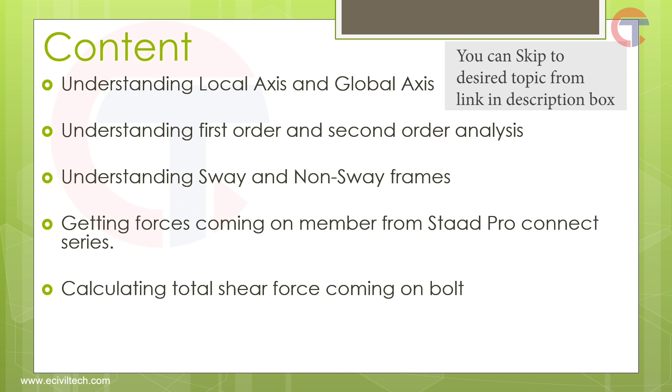I will explain later in this video why I have included this topic. Then we will understand sway and non-sway frames. Then we will learn how to get the forces coming on the member in StaadPro, and after that how to calculate the total shear force coming on the bolt from the member.

Finally, we will learn to design a bolt connection using IS 800-2007 on Excel sheets. So these are the contents which we are going to cover in this particular video.

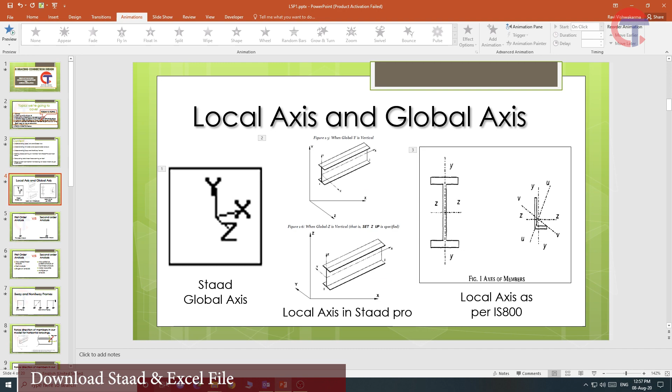Before jumping into local and global axis, let's visit our website and download the content we made in the previous video of this series. I will go to the browser and type www.eciviltech.com, hit enter. This is our website. Go to the Learn button and click on Steel Structure Design. Now I will scroll down to the bottom of the website, and here you can see download supporting files of lecture 4. Click here, choose Desktop, and save it there.

You can see the file has been downloaded now. I can minimize it. Now you can see this folder has been downloaded. I will right click and choose extract files here. Now this L4P1 is the extracted file. I will enter this folder and make a new folder, giving it the name Staad File, and move the 15-meter high ground tower Staad file into this folder. Let's get into this folder and double click on this file to start Staad.

Now you can see this beautiful model of the 15-meter high ground based tower. At the bottom corner you can see the 3D coordinate axis. Y is the vertical axis, X and Z are in plan - these are two horizontal axes. These coordinates are called global axis. This is the coordinate system which Staad follows: Y is vertical, X and Z are in plan.

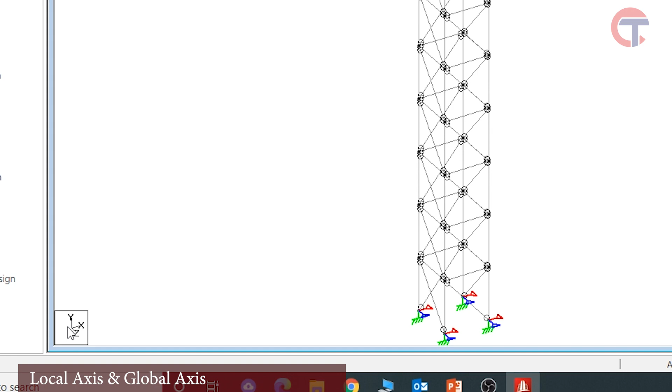Now hold the Shift button on your keyboard and press O. Now you can see these are the local axes of every individual member. Right now it is completely messy and you are not able to see clearly, so what I will do is make only the back panel visible. To do that, I will go to View and choose Top View.

Scroll down to zoom out. I will select the back panel only, then click on isometric view, then click on show selected object. Now you can see only the selected object is visible. Don't worry, nothing is deleted, we are only hiding the front panel to understand it more easily.

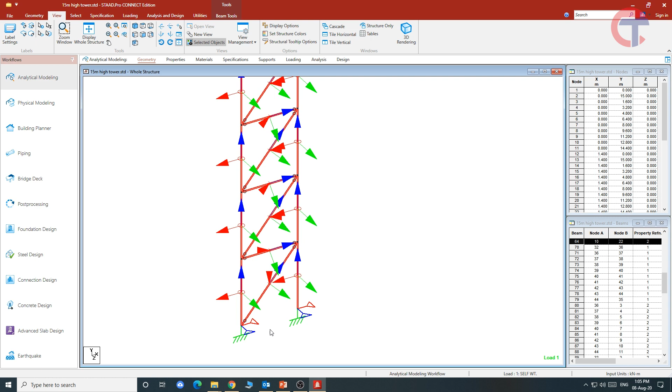Now holding shift button I will press I. You can see 3 arrows are visible now. It is origin. Now you can see the origin XYZ over here, and now I will hide this support because this support is hindering the visibility of the origin.

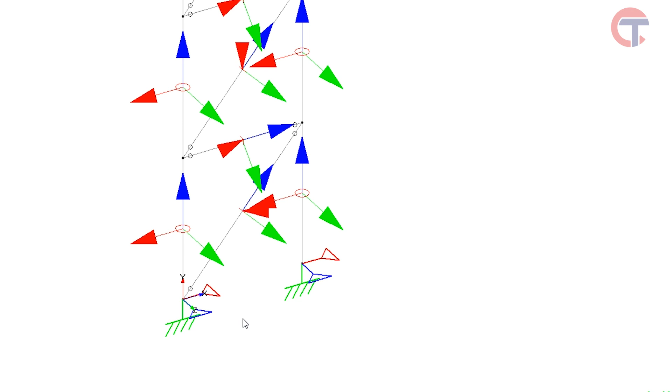To hide the support I will press S holding shift button, shift S. Now you can see the support is hidden. It is actually there, but it is just not visible, so that we can easily see this origin.

Now here you can see X axis is in blue color, Y axis is in red color, and Z axis is in green color. Now look at this member. This X axis is along the axis of the member. Here also for this member, this blue arrow is along the axis of the member. It is along the length of the member. So these are the local axis of each and every individual member.

So what's the benefit of this local axis? These are the two benefits. One, you can apply the load in the direction of the local axis. Second, you can check the forces coming on the member in the direction of the local axis. Let me explain you this.

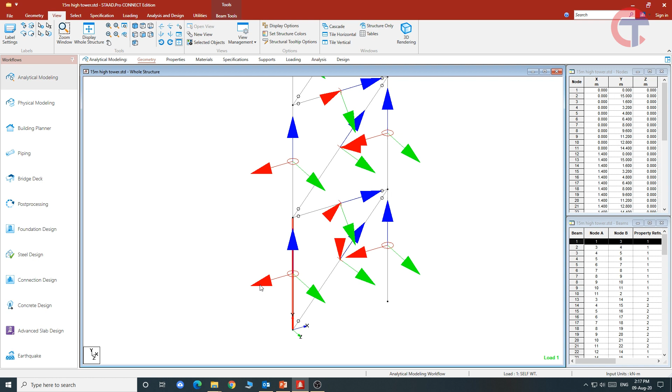Now look at this vertical member. If I want to apply a horizontal load, then I can use two methods. One, I can use global axis, other I can use the local axis. Now let me show you.

I will go to loading, here loading. Let me zoom by scrolling up. I will apply a temporary load, and later I will delete that load. I am just showing you. Now here I will choose this self weight for the time being. Here I will click add, and now I will come to member load.

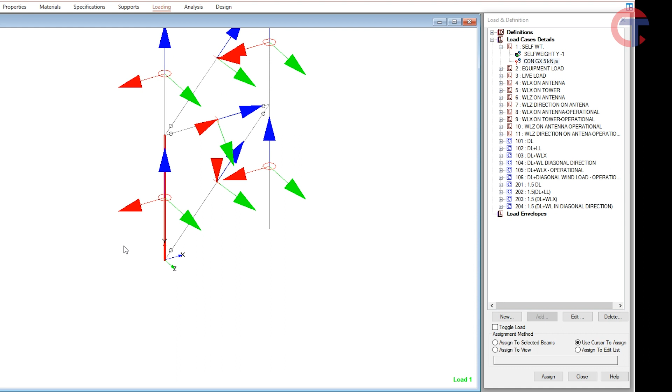Member load, and here I will choose concentrated force. Now let me choose a load of 5 kilonewton. I will type 5 kilonewton over here. Now I will choose global X axis over here, and I will say add. I will close it. Now let me apply this load on this member.

I will select, use cursor to assign. No, I will choose assign to selected beam and assign. Yes, now you can see this load is assigned in global X direction. Now let me apply the same load on this inclined member also, and I will choose assign to selected beam. See here, this particular load is assigned on this member and this member. Now you can see both the loads are in horizontal direction.

Now what if I want to apply a load along the axis of this selected diagonal member? Then it is not possible using any global axis, as the axis of this member is not along any of the global axis. So we can apply load along the axis of the member by using the local axis of the member. Let me show you how you can do it.

Double click on this load which we have applied. Now here we can see we had applied global axis, that we have to change to X local axis, because this blue arrow is showing the axis along the length of the member. So we want to apply the load along the axis of this member. So we have chosen this X local, and now change. Here we will click on change. Now we can see the direction of the load is changed along the axis of this member.

So this was not possible using any of these global axis. I can show you. If I will choose this GY, then it is in the vertical direction. If I am choosing GZ, it is in this Z direction, and if I am choosing GX, then it is in X direction. But none of this global axis is along the axis of this member. So if I want to apply a load along the axis of this member, then I will have to choose this X local axis.

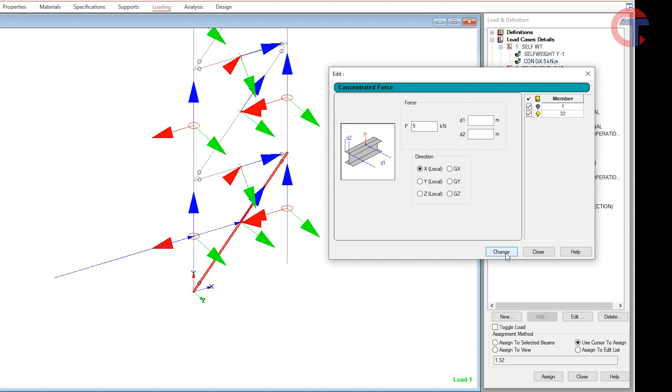Similarly, we can use the local Y axis and Z axis to apply a load along the perpendicular direction of the member. This is the local axis, and this is the benefit of the local axis while applying load on the member.

I will close this. Similarly, after analysis, the software will give us how much load is coming on each and every member. So for this member, if the software gives the load in the direction of the global axis, it will be useless for us. We cannot design any member having loads in the global axis.

Whatever stresses or forces come on the member, they should be in the direction of the member, so we can easily design it, whether compressive or tensile force. So while taking output from the software, it should be in the direction of the member. Here again, the local axis is beneficial for us. So these are the two benefits of the local axis and the global axis.

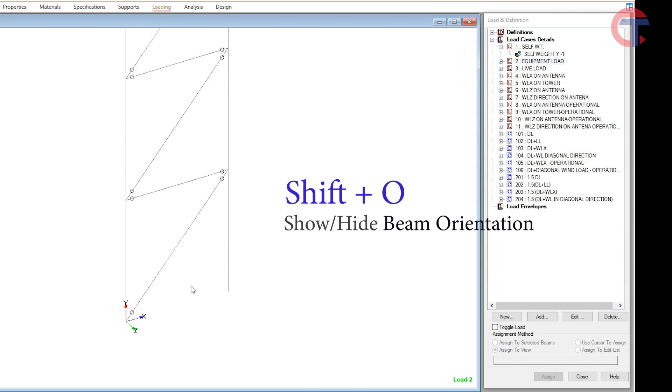Let me delete this, it's not required. Okay, now the loads are not there. Now I will click Shift O to hide the local axis directions, and Shift S to show the supports. Now let's go back to our slides.

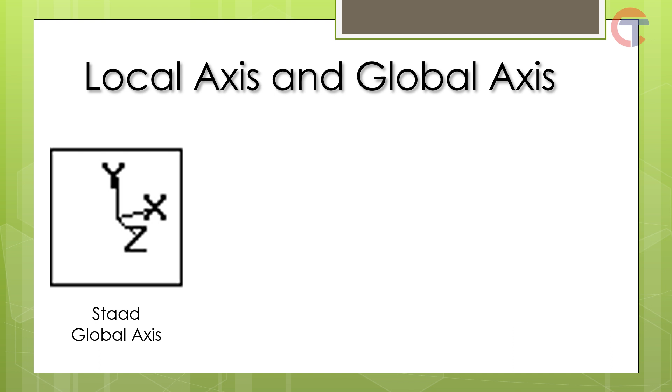Just to give you more clarity, this is STAAD global axis: Y is vertical, XZ is in plane, and in STAAD we can choose our vertical axis as Y or Z. When you choose global axis as Y direction, your local X axis will be along the member, Y will be along the major axis.

And Z will be along the minor axis. Similarly, when you choose Z up, your X axis will be along the member, Z axis will be along the major axis, and Y axis will be along the minor axis. As per our IS code, X axis is along the axis of the member, Y axis is the major axis, and Z axis is the minor axis.

So you can see when we keep Y up, the local axis representation of IS 800 and STAAD Pro are the same. So I recommend keeping Y up only, and by default in STAAD Pro, Y will be up. You can make Z up in STAAD Pro, but it is not required. So this is all about local axis and global axis.

Now let's move forward. Again I will go to view and click on display whole structure. Now I will analyze this structure. To analyze, I will go to Analysis and Design, and we will go to Run Analysis. Save.

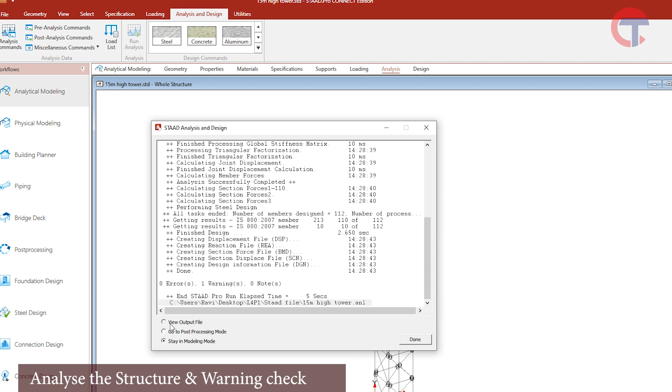We have analyzed our structure, but now we see one warning here. I don't exactly remember seeing such a warning last time. It is a new thing we are seeing. So I will click on View Output File, and click on Done just to check what the warning is showing.

Here we can see a warning. I will double click on this. Let me zoom in a little. It says: the value of moment amplification factor Ky or Kz is greater than 1.4 for member 144.

For load case 203, second order elastic analysis must be performed as per section 4.4.2 of IS 800-2007. Also ensure that the type of combination used is repeat load or reference load instead of load combination syntax, except for response spectrum load cases.

Now first we have to find this member 144, and then look at load case 203. I will keep it aside. I need member 144, so I will go to geometry. I will minimize this, and I need 144.

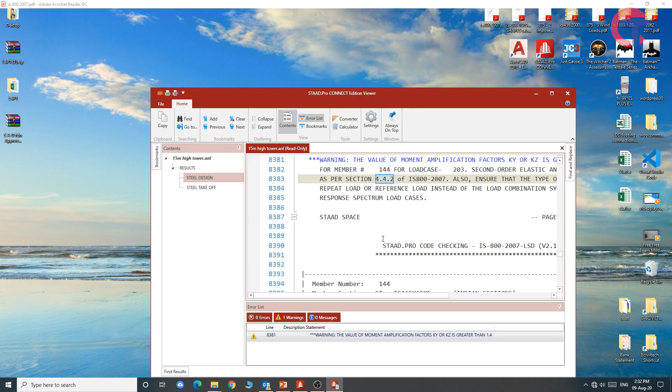Okay, this is member 144, and so we'll have to look at IS code 800/2007, clause number 4.4.2. This clause talks about second order elastic analysis, and this warning is telling us to run second order elastic analysis. So let us first understand the difference between first order and second order analysis.

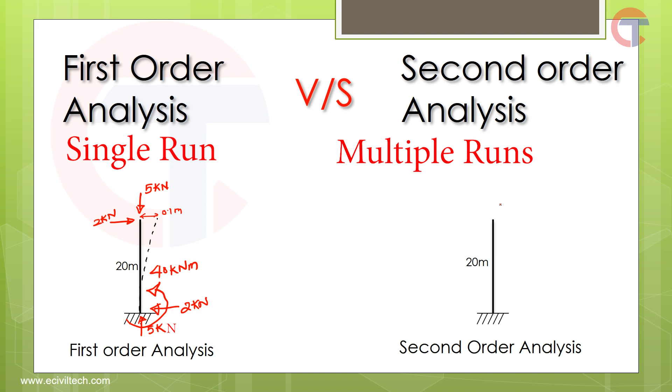Let us assume due to this lateral load there is a deflection of 0.1 meter. Now let's do the second order analysis of the same structure. Second order analysis is also called P delta analysis or non-linear analysis. The basic difference is we do multiple runs of analysis on the same structure in second order analysis, whereas in first order analysis we run the analysis only one time. Let me explain how.

Starting of the second order analysis will be same as the first order analysis. Now you can observe that the tip of the mast has shifted to 0.1 meter. Due to this displacement, additional moment will be generated. This is shifted to 0.1 meter, we are assuming, then your 5 kilonewton load also will be shifted like this. This load will be shifted to here, 5 kilonewton. Now there is a lever arm of 0.1 meter. There will be additional moment due to this displacement of the point. Now additional moment will be 40 kilonewton meter plus your load is 5 kilonewton into 0.1.

It will be 40.5 kilonewton meter. I hope you are understanding this. Additional moment will be generated due to this in this direction and its reaction will be in this direction. So this initial 40 kilonewton meter plus this 0.5 kilonewton meter will be added. So total moment coming on this member is 40.5 kilonewton meter, and this is the second run.

Now we can run this multiple times because due to this additional moment of 0.5 kilonewton meter there will be a little bit more deflection. But after 4 to 5 runs you will get the accurate result. Then the result will not change, the change in result will be very negligible. So in the first run you get 40 kilonewton meter, in the second run you get 40.5 kilonewton meter, and in the third run you can get probably 40.56 or something, because due to this moment it will deflect a little bit more, like 0.11 or something, but after 4 to 5 runs the change in result will be negligible.

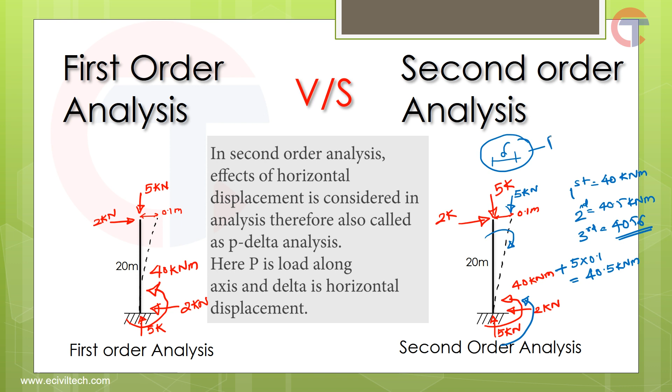So this is the second order analysis. The change in result is not linear, that's why it is also called non-linear analysis. This is also called P delta analysis, as we are considering the change in position, the displacement, the delta. In this analysis we are calculating the deflection, but in first order analysis we are not considering any change in moment due to this deflection. That's why it is first order analysis, and this is second order analysis, also called P delta analysis and nonlinear analysis. So this was the difference between first order analysis and second order analysis.

Keep in mind that the second order analysis gives more practical and accurate result. You can see the difference between the first order analysis and second order analysis. First order analysis is called linear analysis. Second order analysis is also called P delta analysis or non-linear analysis, and I have explained why it is called so. First order analysis is fast because we run the model one time only. Second order analysis is more accurate and practical because we run the model multiple times. So this is the basic difference between first order analysis and second order analysis.

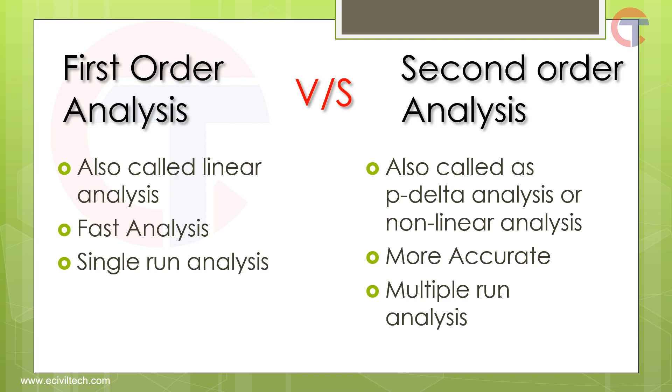So let's move ahead. Now let's come back to the code and try to understand what it is saying. It says, in first order elastic analysis, the equilibrium of the frame in undeformed geometry is considered. So it is clearly saying that undeformed geometry is considered, so deformation of the geometry is not going to be considered. The change in geometry of the frame due to loading is not accounted for.

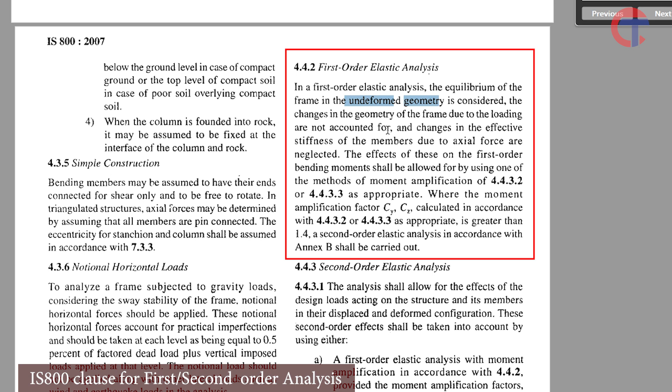So whatever change there is in the frame geometry, that will not be accounted for, and changes in the effective stiffness of the member due to axial force are neglected. This is actually the definition of first order analysis, which I have explained.

Now the second line says you will have to calculate Cy and Cz according to clause number 4.4.3, and if it is more than 1.4, then you will have to run the second order analysis. As we can already see in the warning, it is more than 1.4.

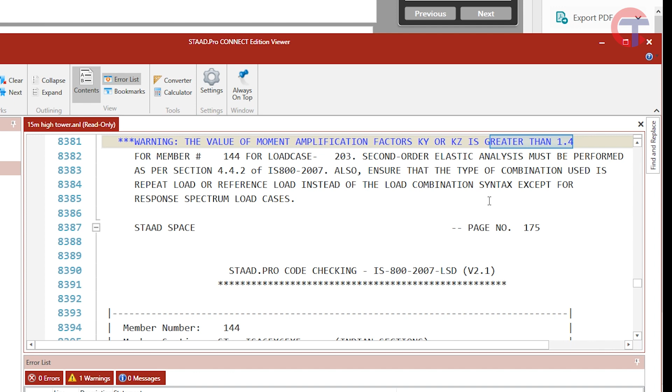We will have to run the second order analysis as per Annexure B, but we don't have to go for manual calculation as the software can do it very easily.

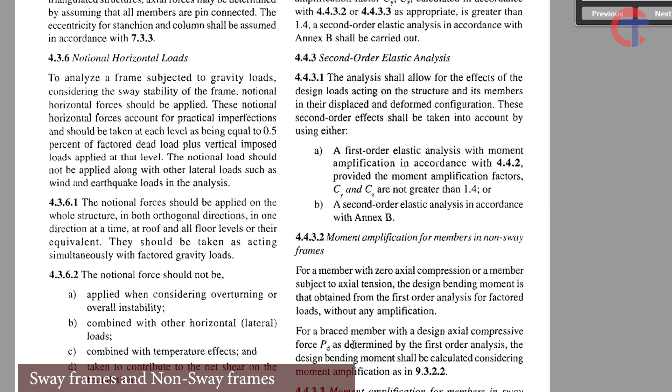Further, this code says for non-sway frames, you will have to check clause number 4.4.3.2, and for sway frames, you will have to check clause number 4.4.3.3. So if you want to run this model for second order analysis, you must understand what is a sway frame and what is a non-sway frame. If you don't know the differences exactly, let me explain.

Now let us understand the difference between sway frame and non-sway frame. Any frame which deflects or sways due to the lateral load is called a sway frame, and any frame which does not sway due to the lateral load is called a non-sway frame.

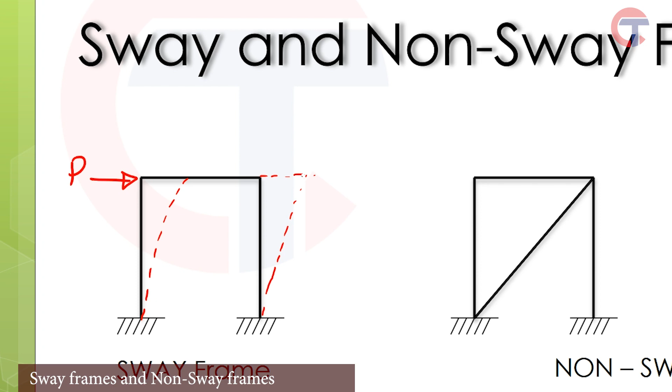To understand it, let us apply a lateral load on this frame. Due to this lateral load, the frame will deflect in this way, and let us assume this displacement is delta. So this is the sway frame, because due to the lateral load there is a change in the position of the top portion.

Now look at this frame. We assume that the length of this member is rigid, meaning it is not going to change axially, or it is negligible. Let's apply a lateral load on this point. Due to this load, the top portion of the frame will not displace, because this member is assumed to be rigid. Since there will be no sway in this frame, it will be called a non-sway frame.

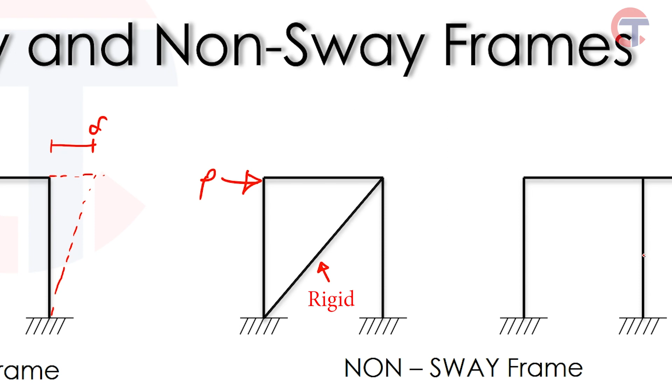Similarly, for this frame, this support will prevent the displacement due to lateral load. If I apply any lateral load here, this support will prevent the displacement. Therefore, this is also an example of a non-sway frame. I hope you are clear with sway frame and non-sway frame.

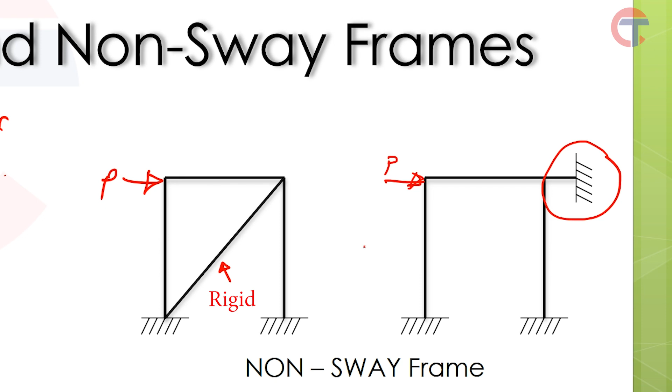In real practice, we can get this kind of support by using shear walls. Now, this understanding is very necessary to understand the behavior of the structure and also for manual analysis. As our frame has diagonal members, we can assume it is a non-sway frame for the analysis.

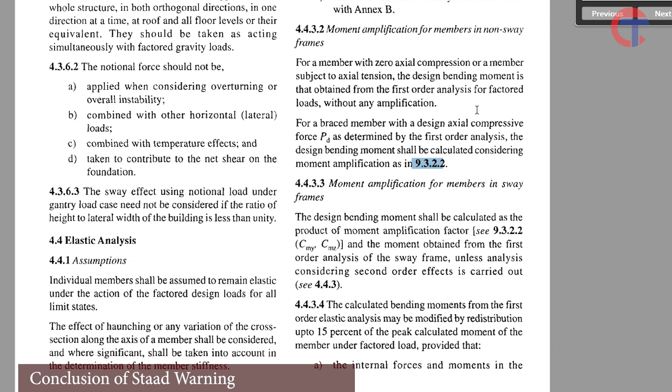Now the code says for non-sway frames, refer clause 9.3.2.2. So let's move to 9.3.2.2, which talks about bending and axial compression. A member subjected to combined axial compression and biaxial bending shall satisfy the interaction relationship.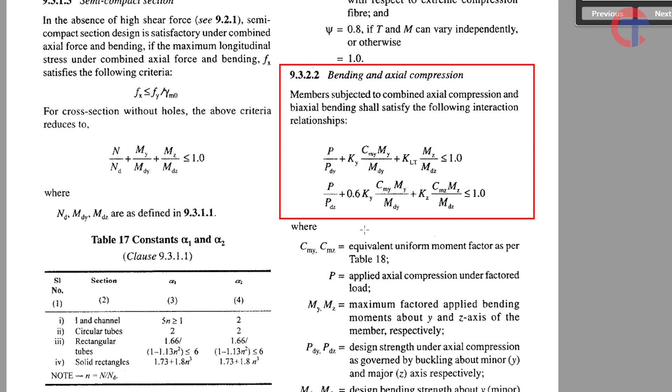So for our structure, I think we can ignore this warning, since it is a bracing and a truss member, there won't be any moment on the member. Therefore, this clause is not applicable and we can ignore it. This warning is not applicable, in my opinion. If anyone has another view, please let me know in the comment box. But I will definitely make a separate video where I will teach you how to get rid of this warning.

Now let's move to the connection design finally. For the connection design, we have to first check how much load is coming on the member. First we will check the horizontal member, so after analysis, I will select all the horizontal bracings. To select all the bracing, I will go to view and choose this front view, and then select all horizontal bracings in this way.

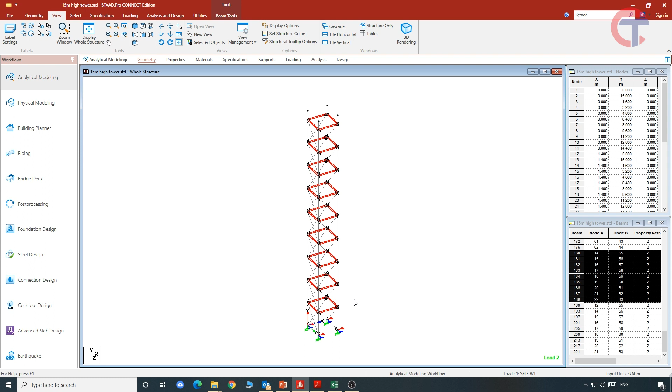Once we are done with selecting the horizontal bracings, I will come to perspective view just to check out whether all members which I have selected are correct or not. So I can see all the horizontal member has been selected.

Now I will go to post processing, say OK, and in post processing I will go to results, and then reports. Now I will select beam and forces. Here I will choose sort by axial force, then click this, and I will choose only ultimate load because I want to design the bolt on ultimate loads only.

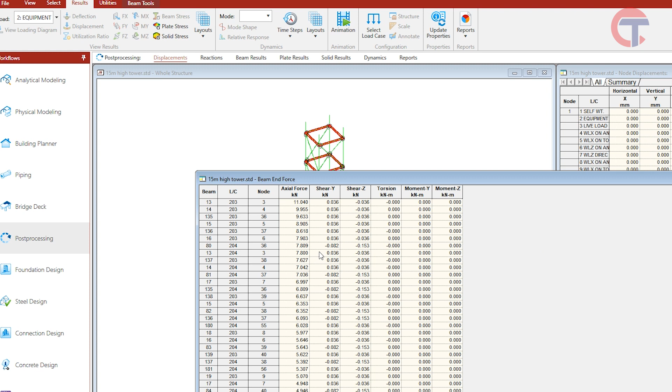So I will take these ultimate load combinations from 201 to 204, click over here to select it, and then say OK. Now this is a report which has been generated.

Now we will open our Excel which we have downloaded. So this is the Excel file. Now let's change this sheet name as design, and let's select this sheet and change its name as connection design. I will just add one more sheet by clicking on this plus sign.

Now I will go to design and select all these cells from this cell to this cell, and Control C to copy, and now come to connection design and Control V to paste. And here I will just select this one, keep source column width.

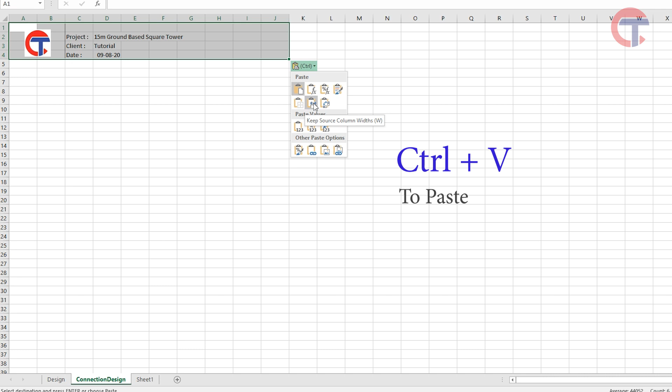By clicking on this control, we can open this dialog, and in this dialog I will click on keep source column width. Okay, and also I will make these rows repeat.

So what I will do is go to page layout, here print titles, and then come to sheet and rows to repeat. So I will select these 4 rows and say enter and OK. So these rows will be repeated.

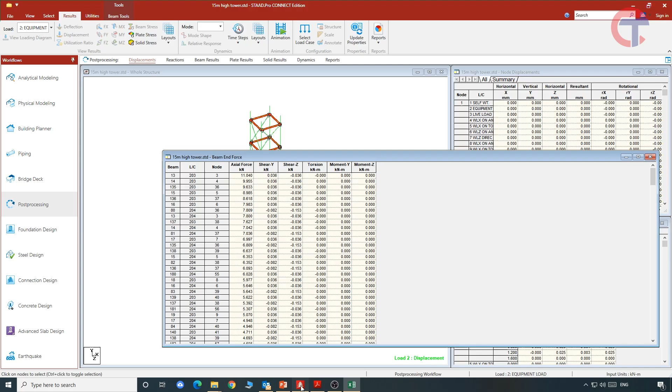Now I will again move to our results. For some reason the results are not being visible. Again I will go to report and beam and forces, axial load, loading I will choose from 201 to 204 and say OK. So this is the thing.

And we can see the maximum axial force is coming on the member number 13, and this is member 13. Now in report you can see it is sorted by axial load because we have chosen that.

Now what I will do is click on beam here, and the entire rows and columns will be selected. On keyboard I will click Ctrl C to copy, and then come to our Excel file which we have just opened, and here in sheet 1, I will paste it over here.

Okay, go to home and just create this thing, borders. Now you can see this is the axial force. I can just wrap this to see. Now you can see the axial force is 11.04 kilonewton, but there are 2 other loads in other directions, y direction and z direction.

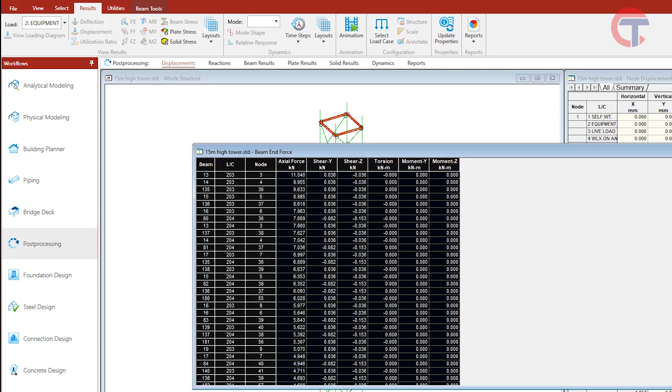So let's come back to the model, and I just want to show you the local axis of it. So I will select the beam cursor and select this beam.

If you don't know where the beam cursor is, you can go to select, and here you can choose select beam. I can choose it from here because I have given some quick commands, and you can also add quick commands here by using this button.

If you press this button, you can see all the commands will be visible on the left side, and quick customization command will be here. So you have to bring these commands here to customize that option as per your requirement. Once you are done, you just have to go anywhere at the window and press spacebar to open this. Okay, so I just want to select this.

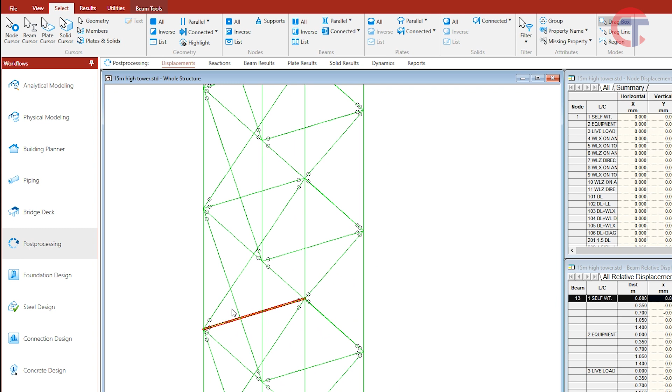Now you can see this blue is the x-axis, along the x-axis, and the force which we have taken here we can see is along the x-axis. Axial force. Here it is not showing x-axis label, but it is along the x-axis. It is just saying axial force.

Okay, now let's come back to the model. This axial force is along the x-axis, and y and z are the perpendicular axes in 3D space.

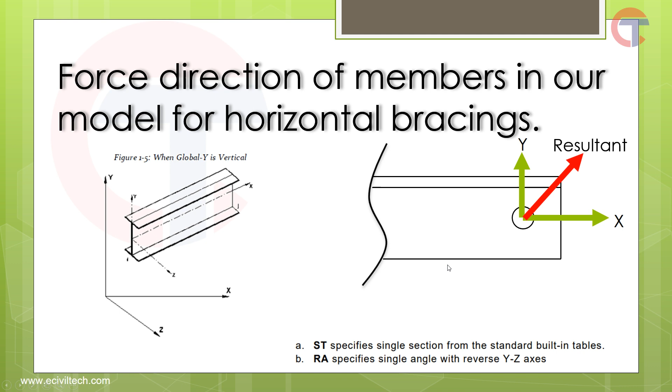If it was an I section, then it would have been very easy to get the resultant. The resultant would have been square root of x square plus y square, the forces in x square and y square. Here we can use this formula directly as the other directions y and z are parallel to its faces.

But for an angle section, the other two axes are not parallel to the faces, so it will be confusing to go with the y axis or z axis in the formula. So for the sake of simplicity, as forces in y and z direction are very small compared to the forces in x direction, I take the maximum of the y and z axis forces.

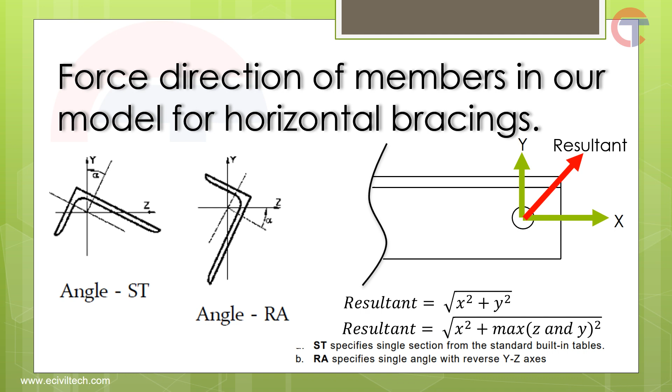So the revised formula will be: resultant is equal to square root of x square plus maximum of forces in the z or y direction, squared. So this is the formula which I am going to use. Let's do it in Excel.

What I am going to do is type 'resultant shear kilonewton'. I will type the formula: equal to square root of axial load square plus max of, taking both, and give square. So the software will check which is the maximum, and that maximum will be taken here and squared. So this is the resultant, 11.04.

So you can see for this particular structure the other direction loads are very small, so the change in the resultant is approximately negligible, but still we will consider this.

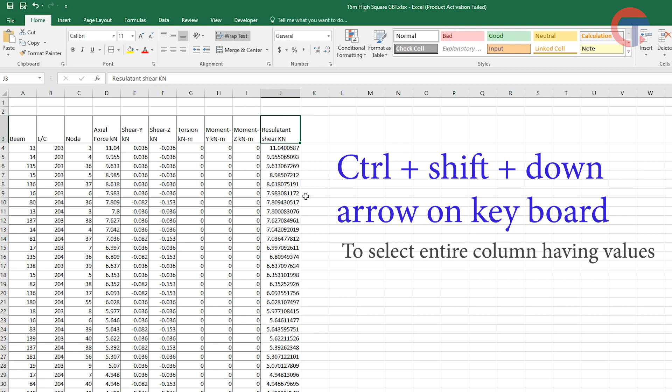Now to apply the same formula to all rows, I will double click on this square. You can see at the bottom right side a small square, double click on that. Now select this cell, holding Ctrl and Shift, click on down arrow to select all the rows in that column, and click on all borders to give the border.

Again I will click on this cell, holding Ctrl and Shift, click on down arrow to select all the columns, and then click on these buttons. Okay, so now it is rounding off to 2 digits.

Now I will select the upper row and go to sort and filter, then click on filter. I want maximum, so I will click on sort largest to smallest. Okay, so now the topmost row is not changing, so this is actually the maximum load.

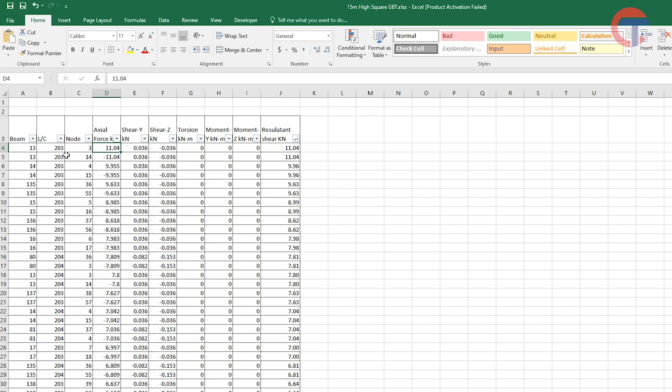So what I am going to do is copy this, Ctrl C, and come to the connection design and paste it over here.

Let me add one row. Select here, Ctrl plus to add one row: 'member load from STAAD report', Ctrl B to make it bold. And here I will write 'design of horizontal bracing connection', Ctrl B for bold, Ctrl U for underline.

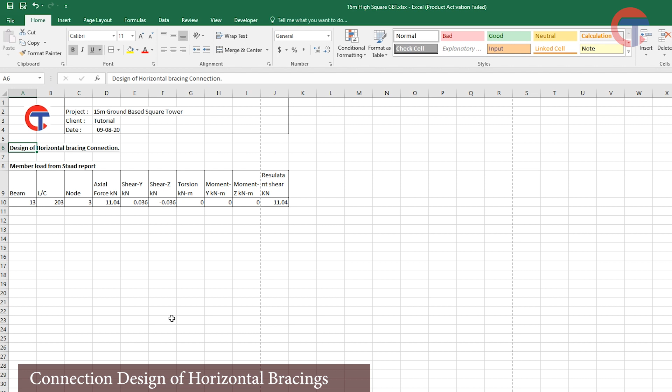Okay, now let's make calculations on this Excel sheet using IS 800 2007. Max shear force coming on bolt, I will say this much kilonewton. I have taken this one, the resultant one, not the axial, because for many cases your resultant will be more. And I will stretch this a little bit.

Okay, and I will come to this page break preview, and here you can see a dotted line. Now after clicking on this page break, I will drag it over here. Now come back to this view.

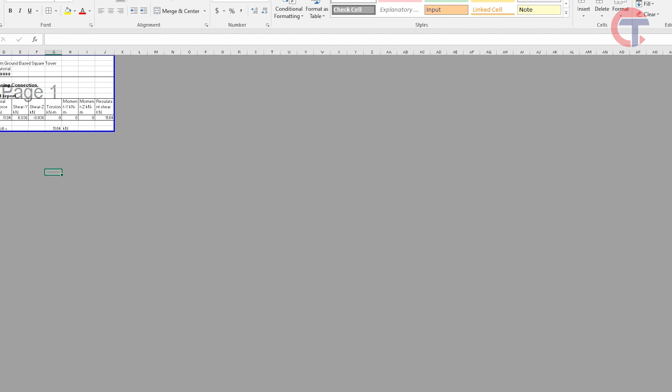Okay, so kilonewton. Now for the time being we will assume diameter of bolt as 16 mm. Dia of hole for 16 mm will be plus 2 mm. You can refer IS 800 for hole diameter.

Now bolt grade we will assume 4.6. So ultimate tensile strength of the bolt Fu will be, as it is a 4.6 grade, ultimate stress will be 400. So I am going to use a small formula. I will use floor, comma 1, and multiply it by 100 megapascal.

Yield stress of bolt, Fy, is equal to 60% of 400. So what we are going to do is 400 multiplied by 0.6. For the 0.6, start the bracket, this minus floor of this comma 1. Now after giving this formula, we can directly change the grade and the values will change directly.

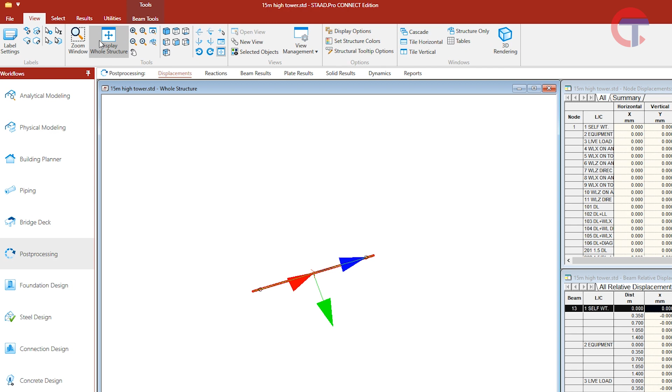Now minimum plate thickness for connection. We are going to connect two plates with the help of the bolt. So minimum will be, just come to the software and click on this in view, display whole structure. Shift O to remove, hide the arrows. Double click on this horizontal member and you can see we have used 65, 65, 5.

So what we are going to do is this horizontal member is going to be connected with the pipe section, this vertical member. So we will weld one plate over here to the pipe, and that plate will be connected with this member with the help of bolt. So if you are giving a plate over here to connect this section and that plate thickness is assumed 6 mm, and here the member section is 5 mm, so we will choose the minimum one, which is 5 mm. Now the plate thickness for the connection is 5 mm, 65, 65, 5 mm angle.

Ultimate stress of plate. So we should know which grade of plate is that. FU of plate is 410 megapascal. So our ultimate stress of that member plate is 410 megapascal. So I will make it here FUB, so that we can identify which is for bolt and which is for plate.

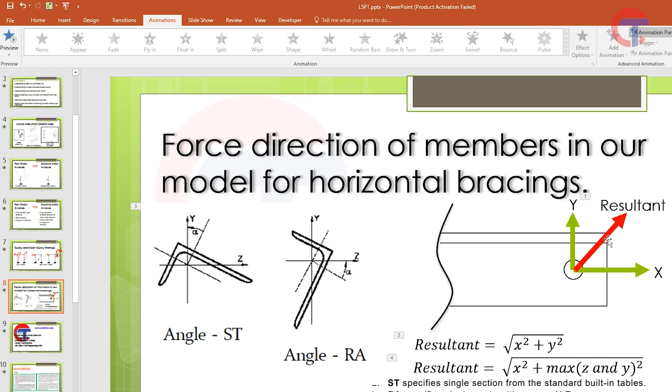Now end distance. End distance is the distance between center of the bolt to the edge of the member in the direction of the load. So edge distance E is equal to 1.5 times of bolt hole dia. This is as per IS 800 clause number 10.2.4.2.

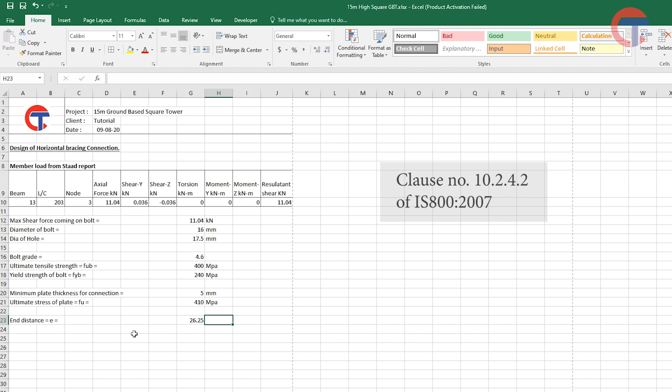So it is coming 26.25, but what we are going to do is we will take an approximate value but the higher one. So what I am going to do is I will apply a formula, ceiling, comma 5. So it will give the values in the multiple of 5.

Now pitch distance is the center to center distance of the bolts. As per IS code, it is 2.5 times of dia of your bolt. So it is coming 40. Here also we will use same formula, but this value is not going to change because it is coming exactly 40. So what I am going to do is I will apply formula ceiling, comma 5. The value will come in the multiple of 5. It is not changing because it is already in multiple of 5.

But in this design, I think single bolt will be sufficient. So this pitch distance will not be required.

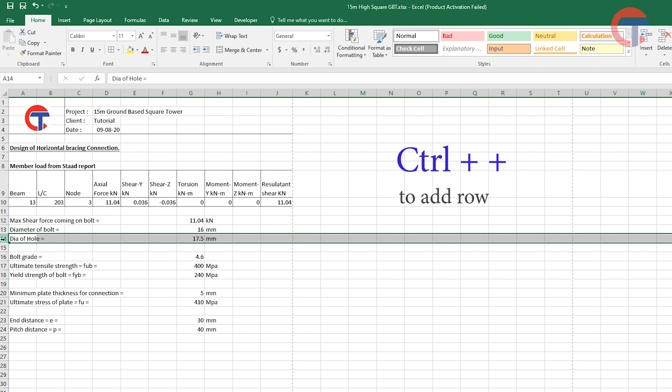One more thing I would like to add here, I will select this row and click plus, 2 times holding control button, to add 2 rows.

Gross area of bolt ASB. So area will be pi by 4 into 16 square. So it is coming 201 square mm. And then net area ANB is equal to into 0.78. Net area is 78% of gross area.

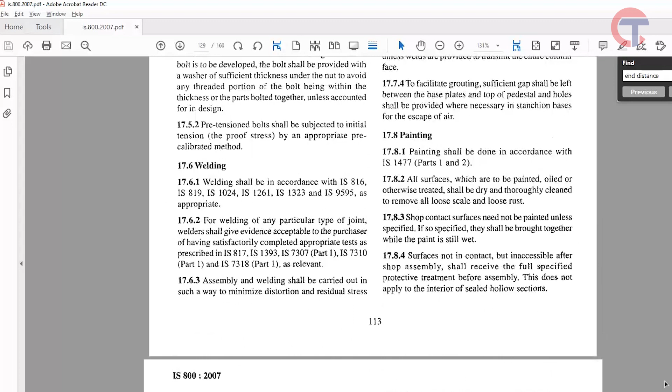So square mm. Okay, now let's come back to IS code to look what formula they are using. Chapter number 10, so this is the formula.

Shear capacity of bolt is equal to Fu divided by square root of 3. So our Fu is 400 divided by SQRT. Here Fu is actually Fu of bolt, not plate, so don't be confused. Square root of 3 into NN, number of planes in that threaded area. So we will consider it 1, into ANB, which is the net area.

And we assume that there is no plane coming in the shaft plane. NS is the plane in the shaft and ASB is the shaft area. So 0 into shaft area is your 201. And again by this you are going to get VNSB, nominal shear capacity. Then again you will have to divide it by gamma MB. Gamma MB you will get in table number 5 of IS 800, and gamma MB comes to be 1.25.

This value is coming in Newton because our stresses are Newton per mm square, that is megapascal, and area is square mm. That's why it is giving the value in Newton. So what I am going to do is click F2 or double click on this, and we will divide by 1000 to get the value in kilonewton.

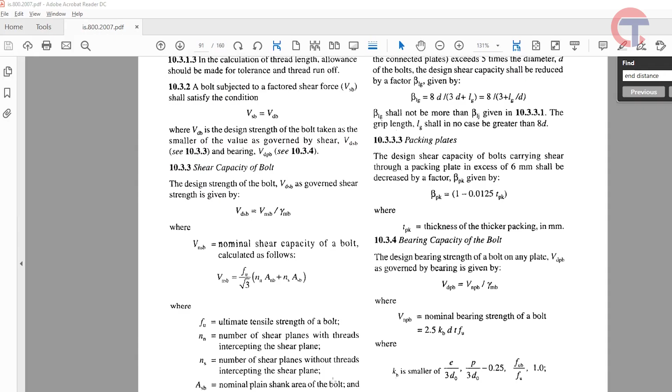So the bolt's value in shear force is coming 28.97 kilonewton. Now we will have to check the value of bolt in bearing also. So for bearings, code is using this formula. Now for the bearing capacity, we will have to first calculate the value of Kb.

So Kb is minimum of E by 3d0, P by 3d0 minus 0.25, FUB by FU, or 1. So Kb is equal to, there are 4 terms in this formula. What I am going to do is make it separate so it will be easy for you to understand. First we take E by 3d0. E is the end distance, it is 30 mm.

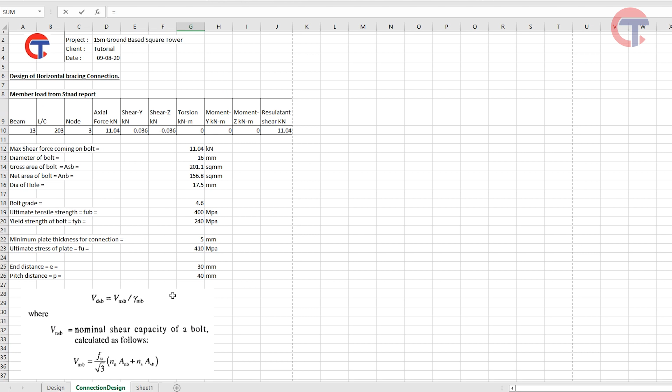30 divided by 3, then we keep this in bracket, otherwise it will multiply, into d0 is the hole dia. So first term is coming 0.57. Second term is pitch distance divided by 3d0. Pitch distance is 40 mm divided by 3 into d0, d0 is your hole dia, minus 0.25, so it is coming 0.511. Then FUB divided by FU, so your FUB is actually this bolt stress 400 divided by 410, so it is coming 0.9, and then finally 1.

So what I am going to do is use the minimum of all of these. I can do this, but I want to make it in one row. So I will copy this. Minimum of 1 is already there, so I am going to copy this. Control C, again come to this formula, click F2 on your keyboard and Control V to paste, comma. So we have included this one.

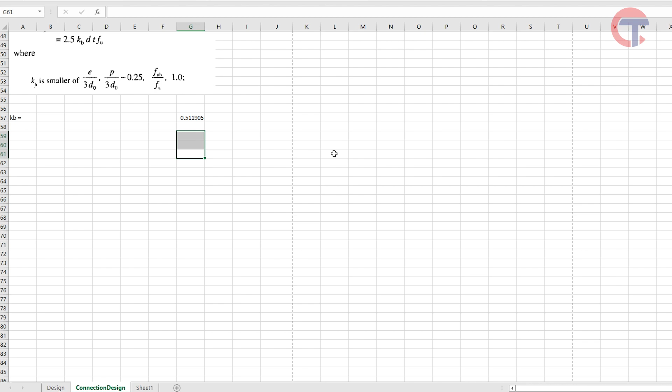I will delete this. Now I will click F2, select this, Control C, then come back to this formula, add one comma over here, paste. See, we are making it separate by using comma. Now I will copy this one again, come here, add one comma and Control V for the paste. So it is actually taking the minimum of all, so it is coming 0.51, and we can delete it. So this is Kb, has been calculated.

Now we will calculate this VdPb, bearing capacity. VdPb is equal to, let's take the formula: 2.5 times of Kb into D, dia of bolt which is 16 mm, into thickness of plate which is 5 mm, into Fu of plate. Here is Fu of plate, so this one. Now this much is coming.

Now this should be divided by what? 1.25 gamma MB, then divide by 1.25, so it is coming 33,000 Newton. So what we are going to do is divide it by 1000, so the value will come in kilonewton. So this is the bearing capacity.

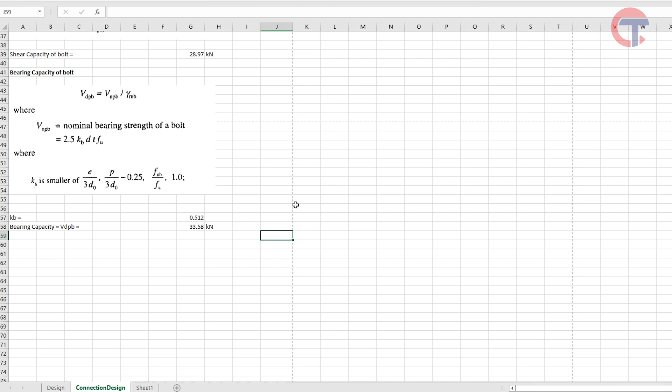Now what I am going to do is I will delete this, or just keep it aside because I don't want to put this in my formula. Here shear capacity of the bolt is VdPb, this kilonewton. Select from here to here and then come to top part of this selection. Your arrow must change like this, move arrow. Now I will select this and move it to somewhere here. Similarly I will move this to here and this to here. I don't need this. So we have calculated shear capacity 28.97 and the bearing capacity coming 33.5.

So we will take the minimum of this. Bolt capacity for shear force is equal to minimum of these two. So it is 28.97 kilonewton.

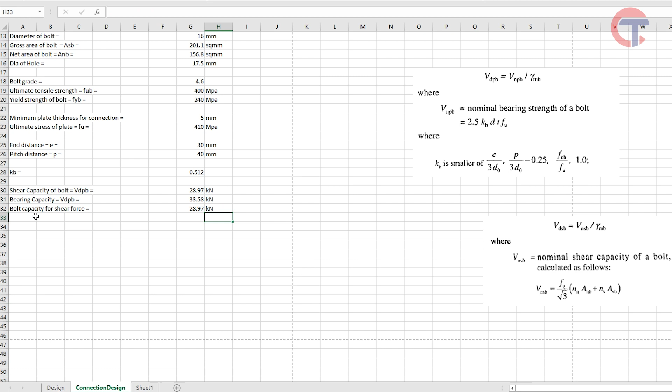Now number of bolts required is equal to how much load is coming, 11.04, divided by what is the capacity of bolt, 28.97. So number of bolts required is only 0.38 nos. So number of bolts provided is equal to ceiling comma 1 nos. So we can use 12 mm dia bolt, so still one bolt is required only.

And for structure we never go below 12 mm. Just for showing you, if I am giving 6 mm dia bolt, then 3 bolts are required. But in structure we never go below 12 mm dia bolt. Okay, the required number of bolt is 1. We can give a final statement here. Provide 12 dia, 1 number of bolt of grade 4.6.

If you want to make this cell also automatic, then what you can do is just give equal to sign and put double quote, and we want this cell to be changed automatically. So what I'm going to do is double quote, double and, in between this put your cell number. It is 12 mm dia. Similarly double quote, double and here I will give this one cell number, and for this also, and your grade should be 4.6. So now this will change as these values.

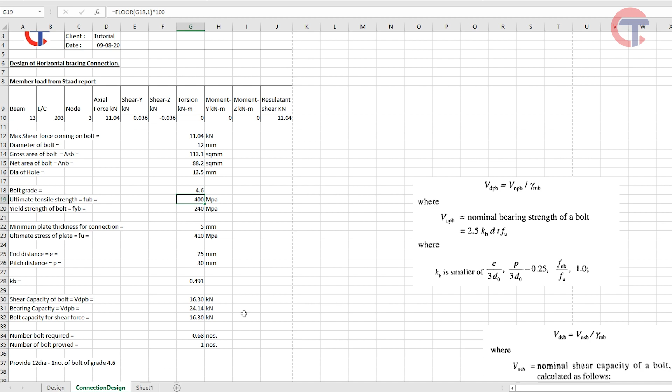Now if I am giving 5.6, it will change to 5.6 and your entire calculation will change. Okay, so right now I am giving 4.6. So this way you can make an automated calculation.

See, if I am making page view, then all pages are visible. So I want to make only this page to be printed. So what I am going to do is I will go to page layout, and here I will choose set print area. Okay, now only this much part will be printed if you will do printing.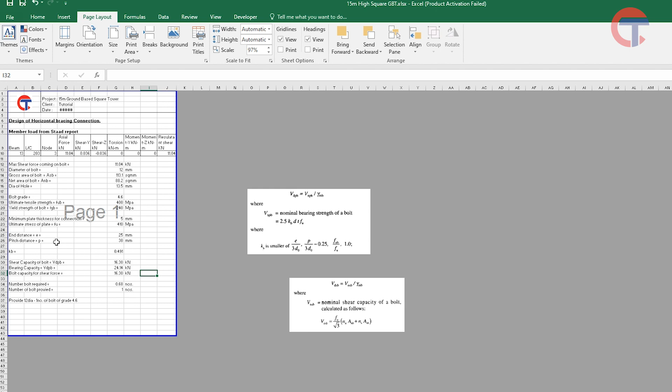You can make bold over here. Okay, so one bolt is sufficient. You can add factor of safety also, but I don't think it is required. But always keep factor of safety consideration for bolts 20 mm and above.

So if you want to add factor of safety, what you can do is just move it here, and factor of safety FOS is equal to capacity of the bolt into number of bolt divided by total load, will give you the factor. So factor is coming how much, 1.4.

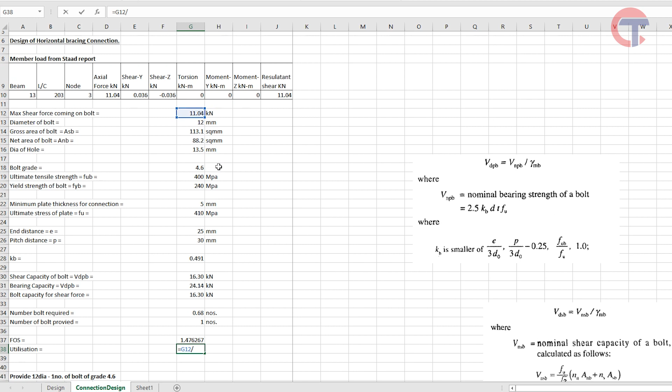And if you want to check the utilization, then utilization is inverse of this FOS. If you want to calculate utilization, then it will be inverse of that. So total load divided by capacity, total capacity is this into number of bolts whatever you are providing. So it is 0.67. Some people used to show FOS, some people use utilization, whatever you want, but if you are using FOS, then it should be more than 1.2 for the bolts, and if you are using utilization, then it should be less than 0.8.

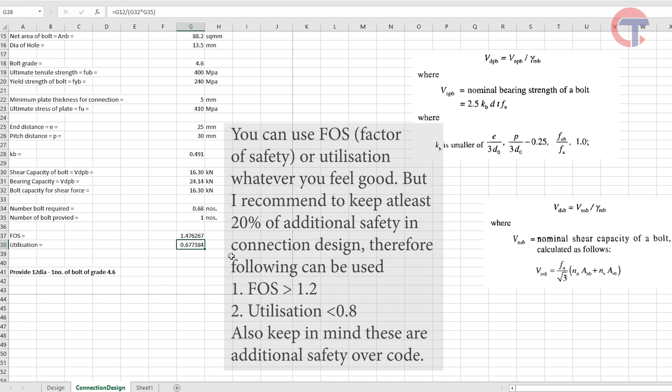I mean the total utilization of the bolts should not be more than 80%. Okay, but I don't want to show these things in my calculation, so I will keep it aside, I will just keep it here.

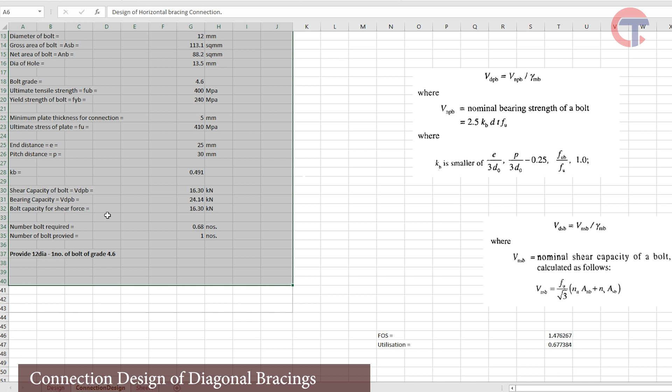Okay, now I want to make the same calculation for my diagonal member, right? So what I'm going to do is I will select from this cell, hold shift button and select anywhere here. Now I have selected everything. Control C to copy, click on Control V, and I will click on Control V to paste.

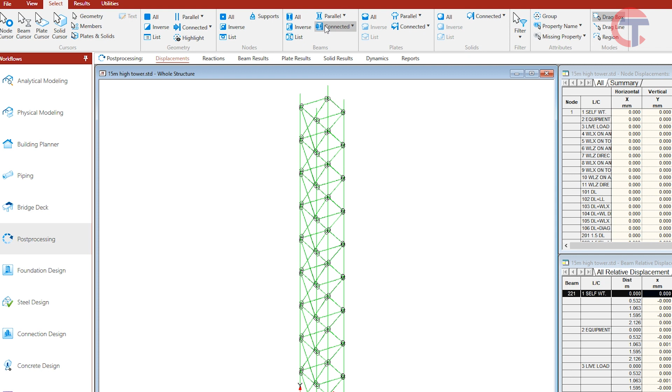Now here I will change design of diagonal member connection, diagonal bracing connection. Now we need to check whatever forces are coming. Now I will add one more sheet from here, sheet 2, and we'll come to our model and select all diagonal bracing. The most simplest way to select the diagonal bracing is we will go to select tab and then click on this, select parallel to X, select parallel to Y, and then select parallel to Z.

Now see, these are based on the global axis, and diagonal member does not fall in any of these axes, so the diagonal members are not selected and rest all members are selected. So we can inverse this selection. So this is one of the fastest ways to select any diagonal member. So it has been selected.

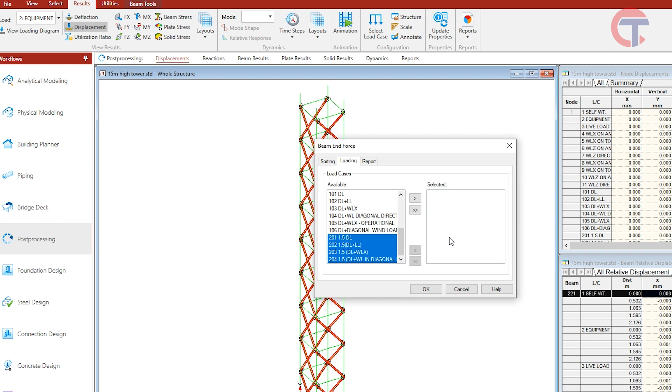Now again I will go to results, reports, beam end forces, axial force here shown by axial force, loading, click this button, select only 201 to 204 holding shift button with the help of left click of your mouse, then select all the loads and say OK. Okay, now again so you can see 16 kilonewton is the maximum load it is coming.

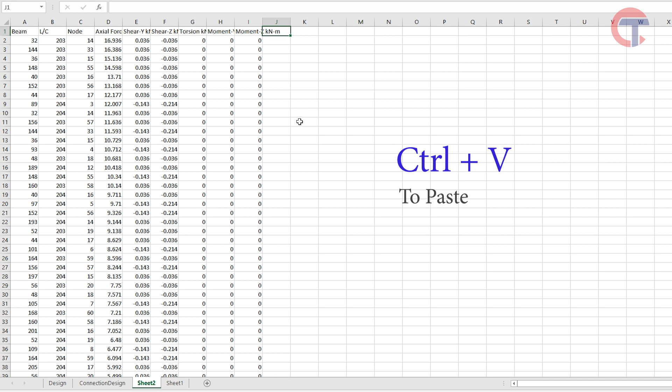Select this, Control C, come to C2 and Control V to paste. Again we are going to copy these two things from your previous sheet 1 and paste it over here. As I have explained, it is taking maximum of Y and Z for this term, and for this term it is taking axial load.

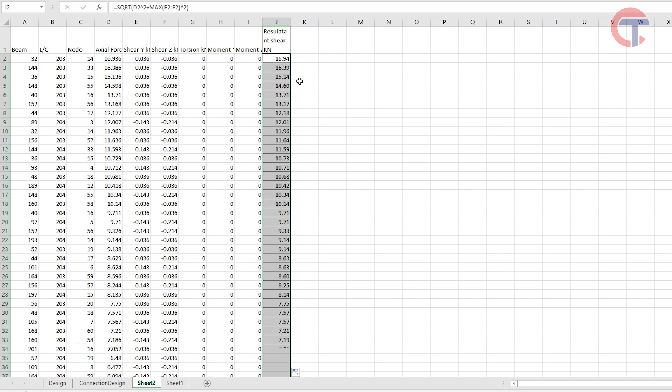Okay, I will double click on this small square box at the right bottom so it will be applied to all. Now, holding Control and Shift, click on right arrow, then holding Control and Shift, click on bottom arrow, so it will select everything. Come to home and select all, make border. I can wrap this so it will be good to look.

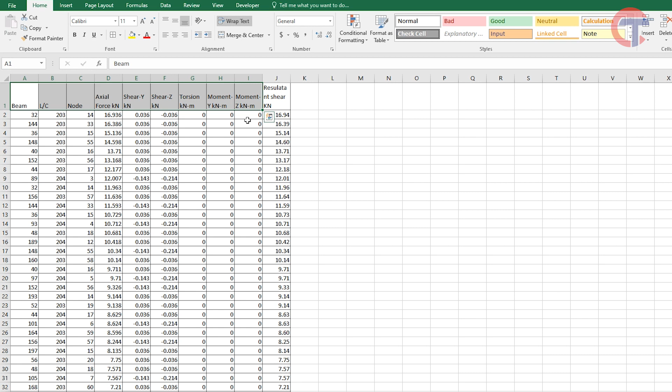Now I will select the top row, come to sort and filter, and apply a filter. I will apply a filter from largest to smallest, so the maximum value is coming 16.94. Now again I will copy this, Control C, come to connection design, and here we are simply going to paste.

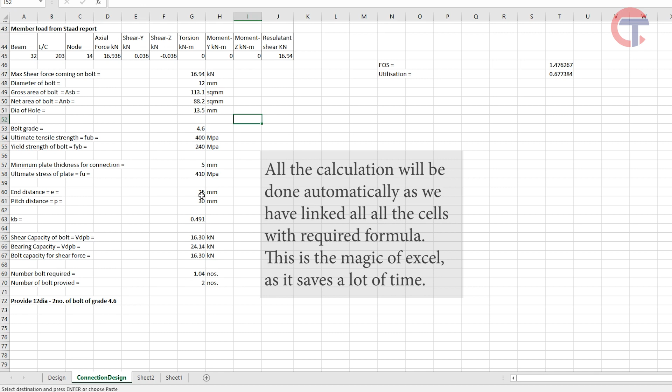Maximum resultant force is coming 16.94. Now we can see two numbers of 12 mm dia bolts are required. So with this we are done with our mathematical part of design.

With this much knowledge you can design any simple connection. Now I am going to give you some additional knowledge which will make you a good designer. But before that, one question to you is, what features make you a good designer, or who is a good designer? Please pause the video and give your opinion in the comment box.

I think for a good design engineer one must follow three things. First is safety, second is ease of construction, and third is economy of the structure. The first part is safety, which we have already covered in this calculation, as we have followed the code.

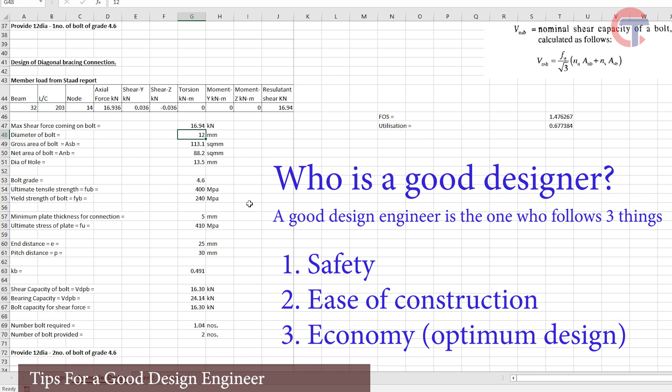As we have seen in our calculation, we are assuming the material factor, we are assuming the load factor, and over that we are giving an additional 20% of safety from our side. So we have covered this factor of safety part.

Second part is ease of construction. If we give 2 bolts, the fabrication work will increase and it will take more time to drill 2 holes rather than 1. So we will increase the diameter of bolt to 16 mm and provide a single bolt instead of 2.

So here we will change the diameter from 12 to 16. Now we can see the number of bolts required is only 1, so the number of holes required will also be 1. Fabrication work is reduced because instead of 2, now the fabricator has to drill only a single hole for each connection.

Now let's come back to the horizontal bracing connection. For horizontal bracing we had provided 12 mm diameter bolt, and for diagonal bracing we are providing 16 mm dia bolt. Here you can see this. This will create a variety of bolts and holes as well.

If we are giving 2 types of bolts, then the fabricator needs to keep in mind that 2 types of holes need to be drilled, and the procurement guy has to procure 2 types of bolts. So for ease of construction we will make this also 16 mm dia bolt.

So I am going to make this 12 mm into 16 mm. Now we are using only 16 mm dia bolt for both types of connection. The variety of bolt is reduced. Instead of giving 12 mm and 16 mm, two types of bolts, we are giving only 16 mm dia bolt for ease of construction, so there is only one type of bolt which makes the work easy.

So with this we have completed our design with safety, ease of construction and economy. I hope you learned something new in this video.